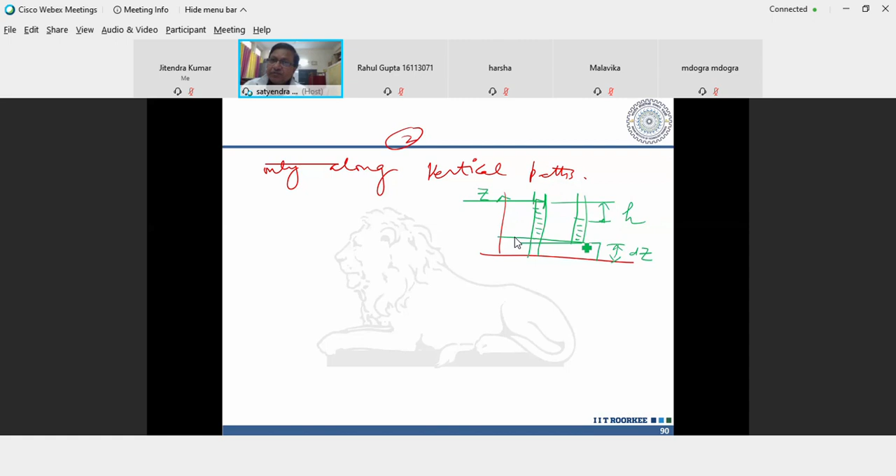And if I attach the piezometer here on the top of this sample, obviously water will rise only up to here. So there will be some difference, that is called, say, H. Now, why is this pressure rising? Because I am applying certain pressure. Delta P is a pressure increment. Initially the sample was saturated, but I am applying some delta P pressure, so it will make the rise of water into the piezometer tubes like this. Now you will agree with me that everything is explained in this figure.

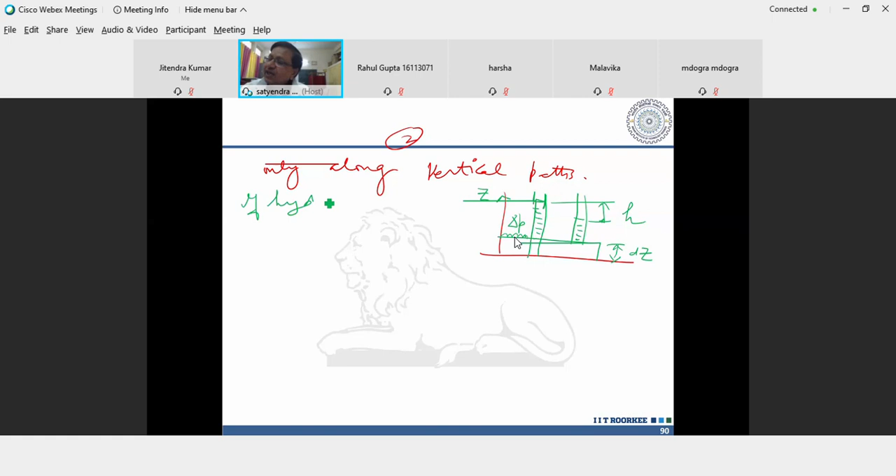So if hydrostatic excess pressure at any point within clay layer is U, then the unbalanced hydrostatic excess pressure

for a sample of dz thickness is given by U plus del U upon del Z into dz minus U is equal to del U upon del Z into dz.

Because U was already there, and now we are applying certain pressure, that's why this is something plus. This plus sign came only because we are applying the external pressure, minus the initial without application of the pressure. So this is the equation. Now this is a pressure, and we know that pressure is equal to gamma H, gamma W into H.

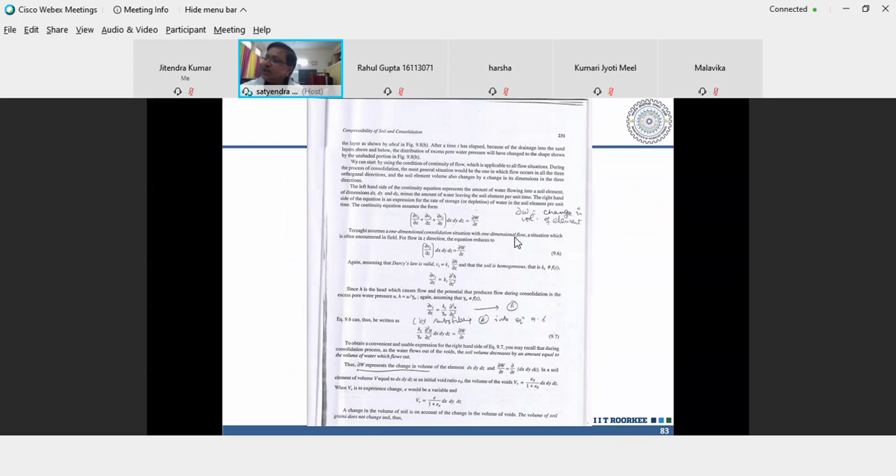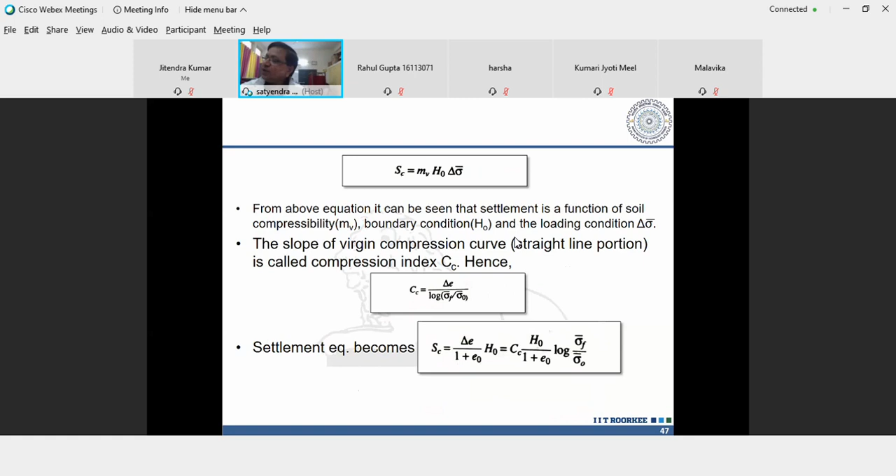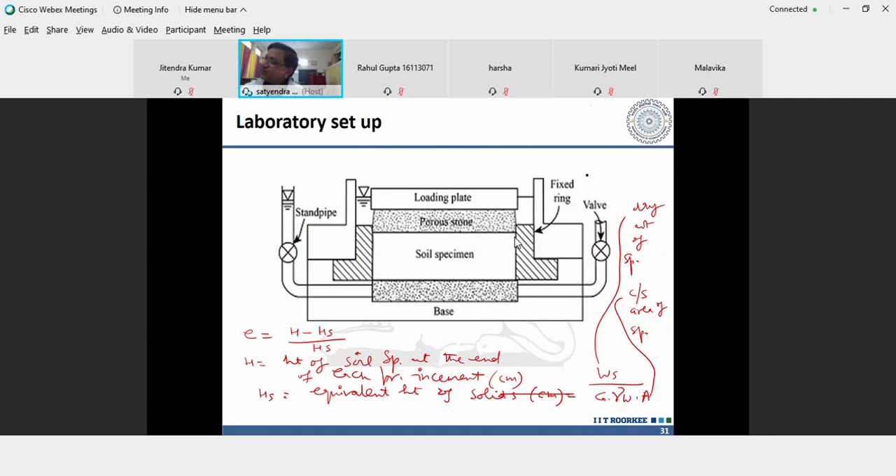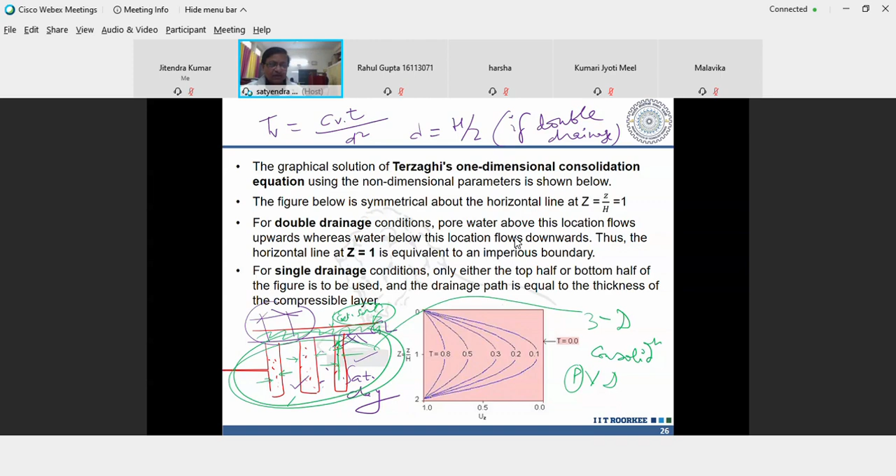So this is also given in the previous slides, and all those slides I am going to send you also. But because at that time it was too early to explain the occurrence of those curves, I did not explain it then. Yeah, this one. Today is the right time to explain how consolidation takes place in clay soil under pressure increments.

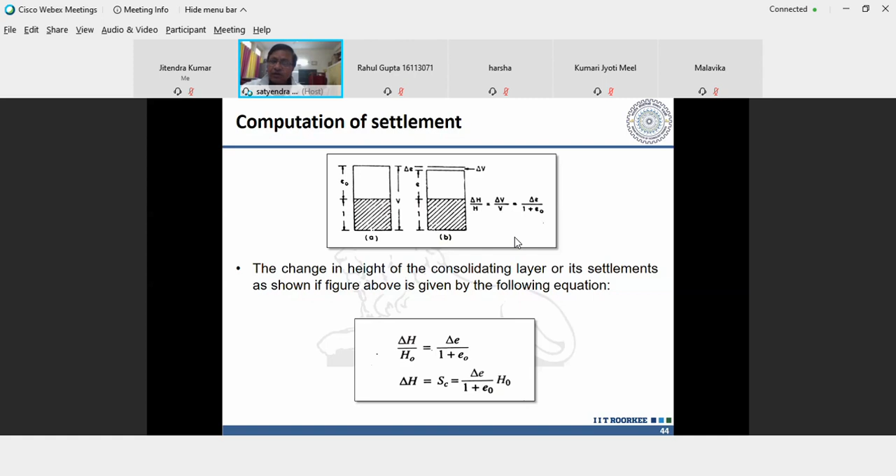Now friends, whatever I have discussed so far, we believed that consolidation is taking place in the vertical direction only. Now let me start the discussion on three-dimensional consolidation. The first point is that whatever discussions we have done so far were on the assumption that consolidation takes place only in the vertical direction.

But in real life, consolidation is in 3D. It is always 3D consolidation. So we should be more interested in three-dimensional consolidation, but you cannot understand it until you know the basics of one-dimensional consolidation. For understanding three-dimensional consolidation, let us try to understand it from the basics.

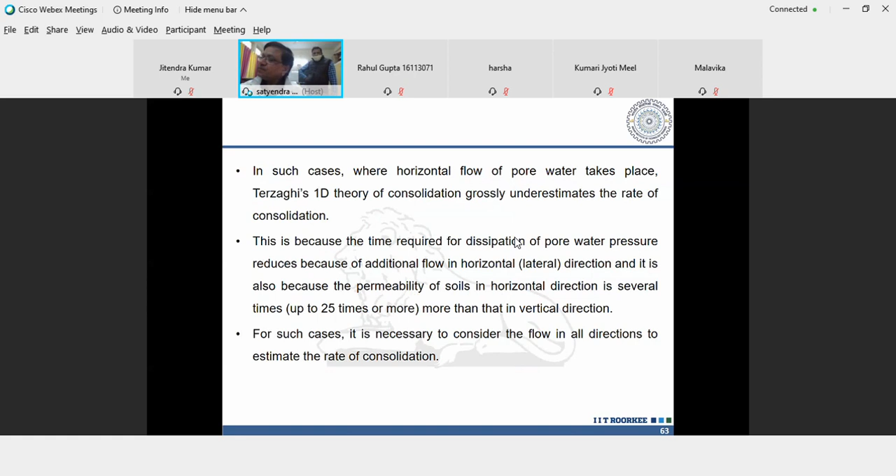Okay friends, just kindly wait, I have to add some blank slides. Because although I have a PowerPoint presentation like this one, I thought let me explain you step by step so that the things are more clear to you, so just kindly wait for 2-3 minutes.

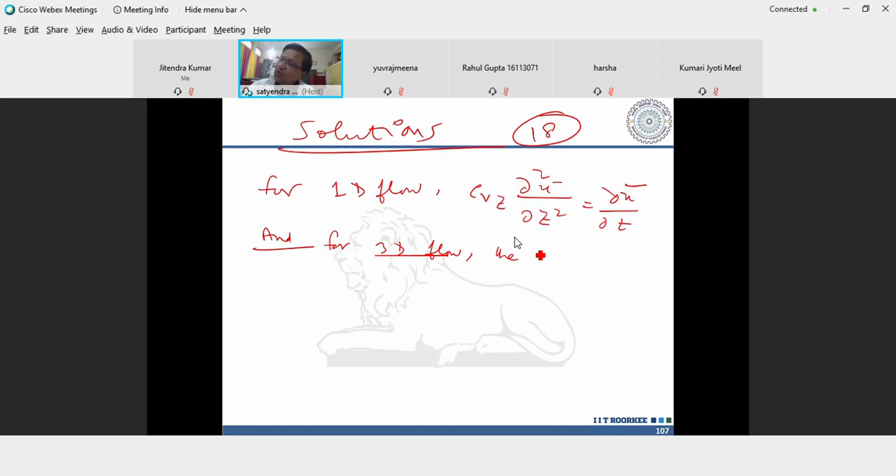Now you already know that for 1D flow we use CVZ; this is for 1D flow, and for 3D flow the flow is always radial. Radial means in all the directions. Let me try to explain: this is a ground level and this is all clay soil, highly plastic clay.

Then if I provide a sand drain like this, full of sand, and I apply some pressure on it, obviously water will move radially towards this. And at the same time, water will start traveling upward. These are sand drains. The moment water comes into these sand drains, the water will start traveling upward by itself due to capillary action.

Sand will facilitate the movement of water into the sand drains. So that's why we call it radial flow. Radial means this is moving like this, like this, like this. So for the radial flow, the equation is CVR into del 2U bar upon del R square plus 1 by R del U bar upon del R, equation 13.